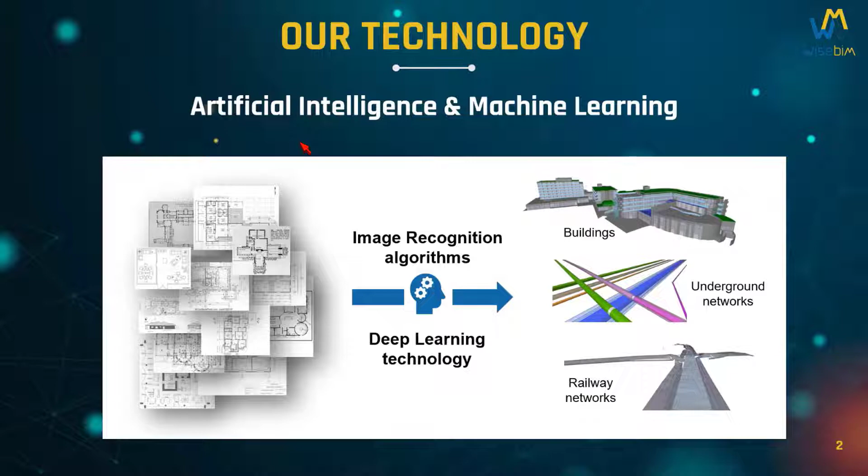As you know, today the challenge is the modeling of plenty of existing buildings. It's too long, it's too expensive. And what we bring, what is our mission, is to simplify and accelerate the modeling process and offer our clients the most efficient preliminary steps. And of course, based on openBIM standard, which is important for us and for our customers.

So let's focus on Plans2Bim. Plans2Bim is an online solution which enables modelers, BIM modelers, to quickly transform directly their 2D drawings into BIM, thanks to artificial intelligence. Just to note, it's patented.

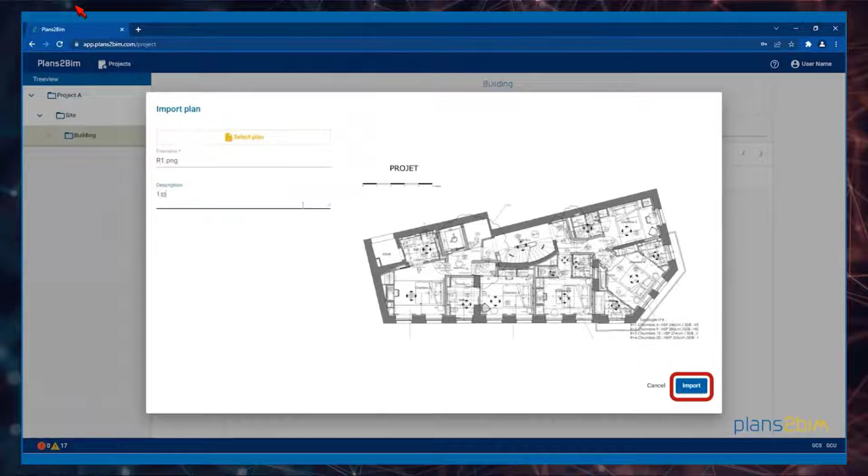So how does it work? You just go online, you have to connect to the platform. You can even try it here already. You create a project, you just provide the description. So we have project A, the building. And we are going to upload a 2D drawing. It could be a PDF, a JPEG, or a PNG format. So we work on pixels.

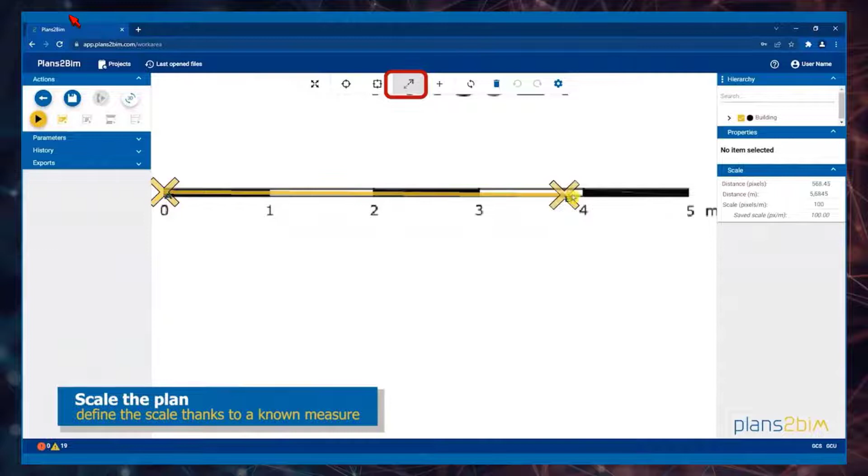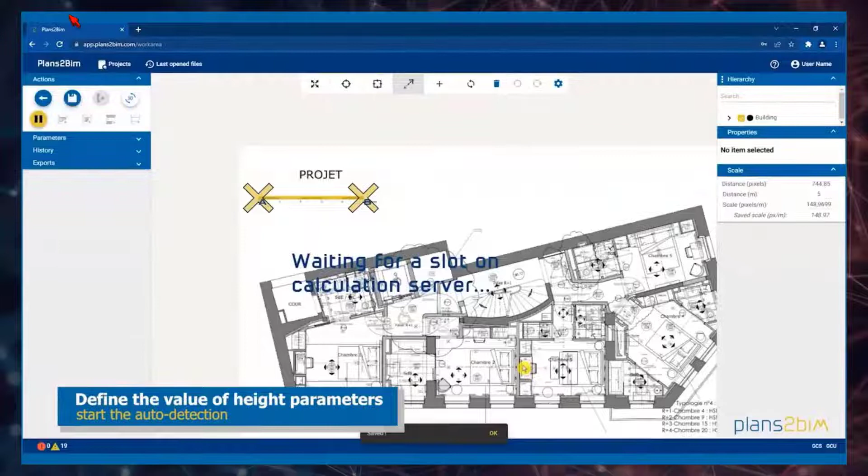After that, we go to the main part, which is the modeling tool. First of all, we have to set up the scale, manually, thanks to this little tool, in order to have a number of pixels per meter. This is quite the only thing to do manually for now. After that, you can launch the algorithms. You can define some heights, like height of the doors, height of the walls, and then you just run the algorithms.

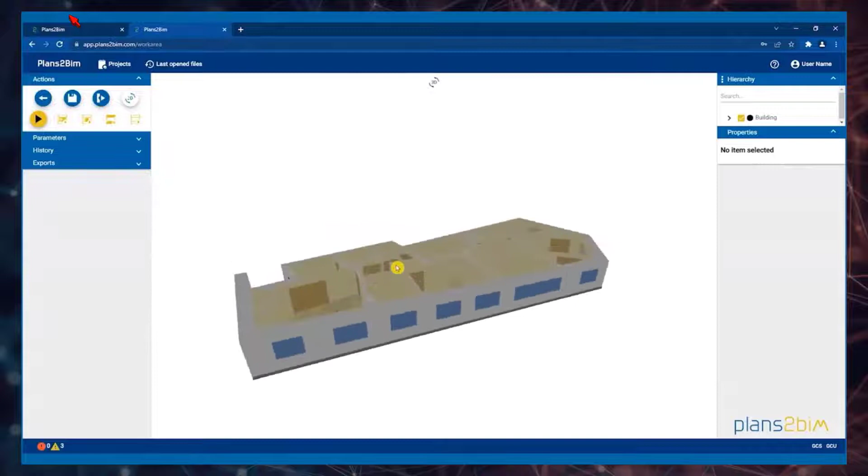In a few seconds, you can have all the walls, doors, windows, slab, spaces, soon columns also. After that, you can see in our 2D or 3D viewer the BIM model which was created. And the good thing also is that you can modify and correct the results directly online, which means you have a tool to create, even from nothing, a BIM IFC file directly online.

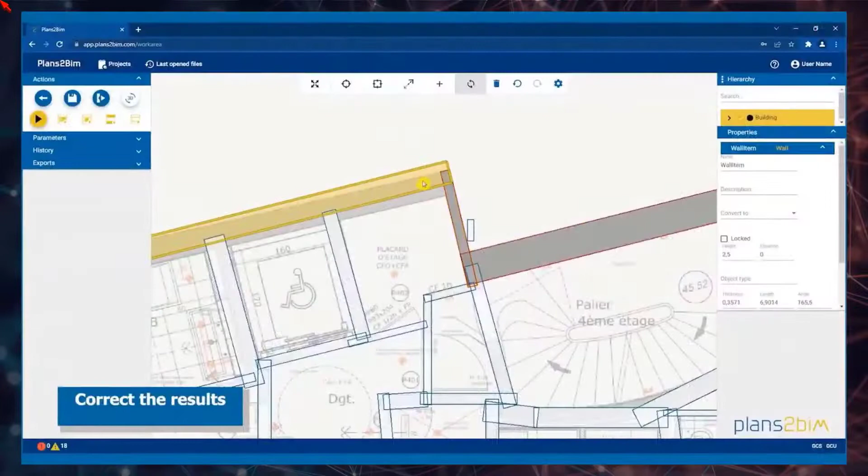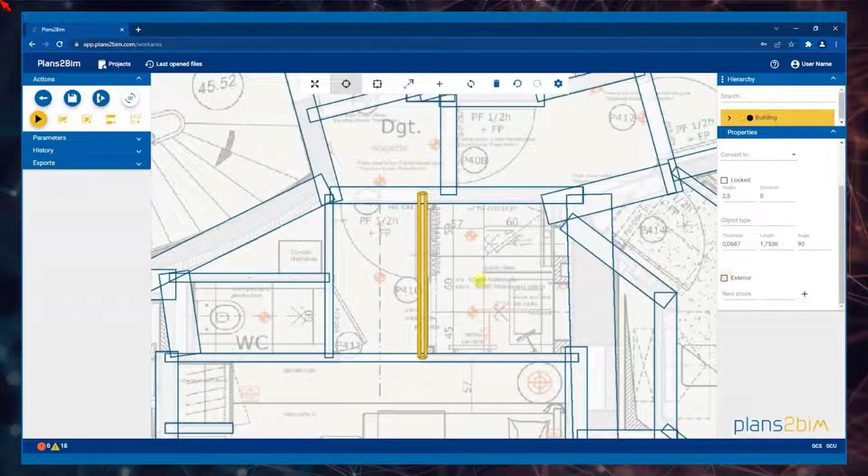So here, for example, we can move a wall, we can suppress some elements, we can also create walls, columns, windows, and so on. So here we just simply create a wall. This wall you can set if it's an external one or an internal one. And after that, you can change, for example, this window into a door. You can change everything, in fact, in this tool.

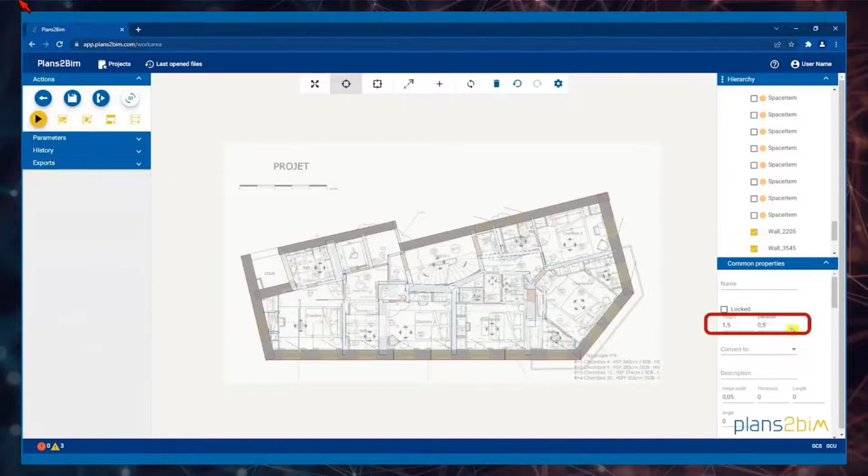So it's quite easy. You can also change the height of any element. Here we are changing the height of the window. And after that, you can even set the properties of elements. For instance, here we set the IFC material to concrete for a wall, but we can also set the material of wood for this door.

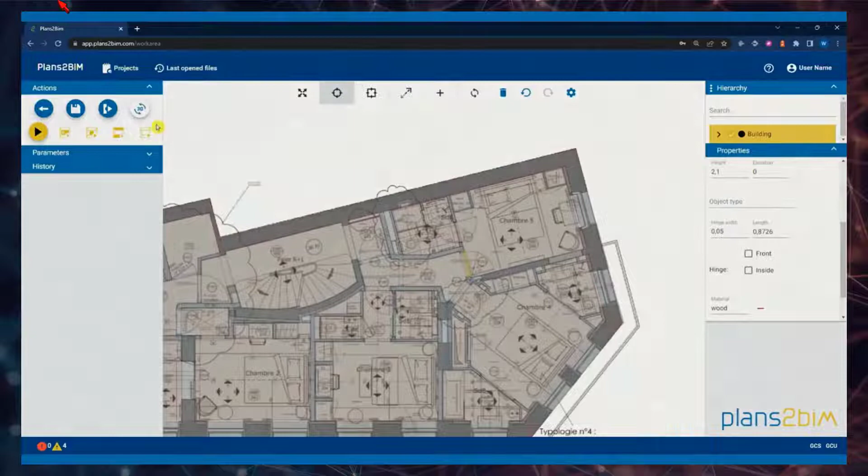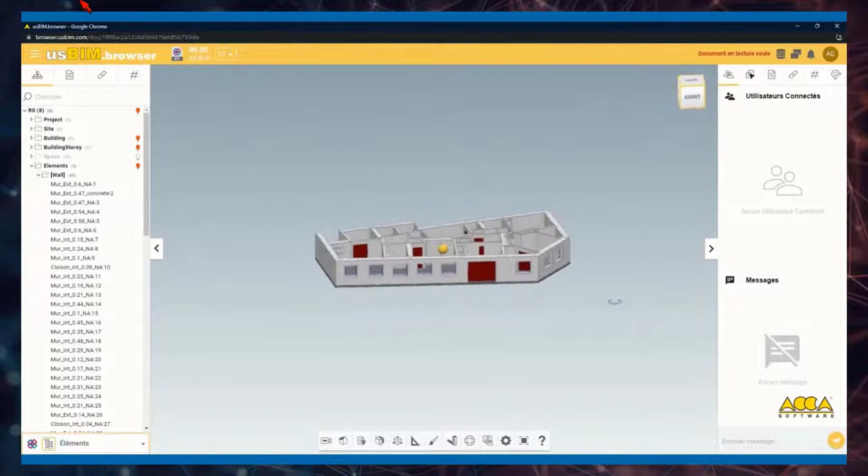After that, you can export in IFC format. Here we export directly. We will see after that we can also export some quantities. So we launch the export, and we can see the IFC file in any kind of viewer. In this example, it's a usBIM viewer from the ACCA software. So you see that it works quite well—the concrete is well defined here.

So this is important. It's an IFC file that we create from scratch, from A to Z. It works very well with any kind of software, even including Revit. And we can also assemble different floor levels.

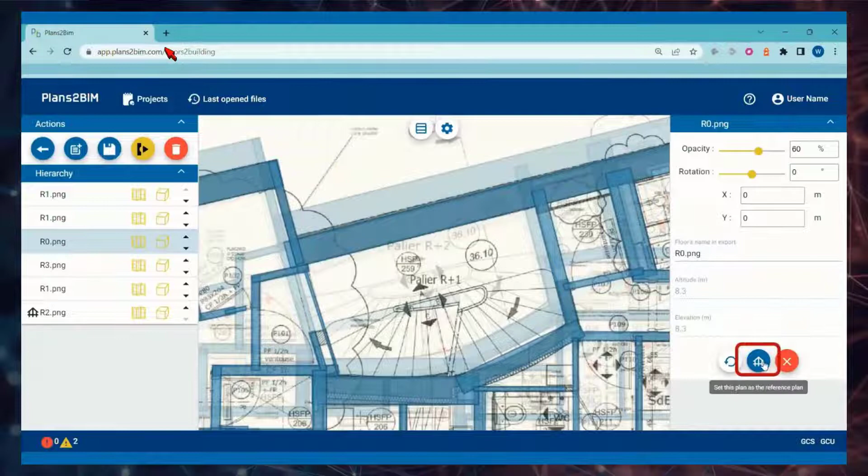Okay. So this assembly is done manually. We just overlap the different floors. You can even add the same floor several times in order to have a whole building. And in this case, you can see that it goes very fast. You just set one of the plans as a reference plan, and after that, you overlap the others from this reference floor. Okay. For now, it's done manually, but soon it will be done automatically.

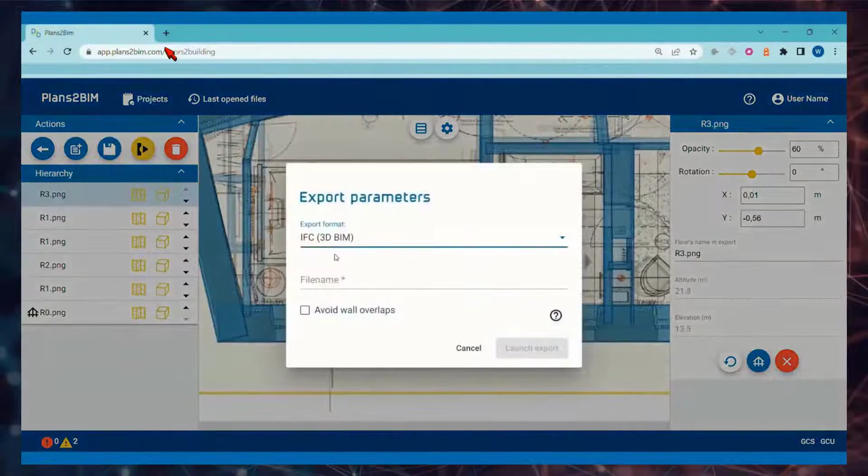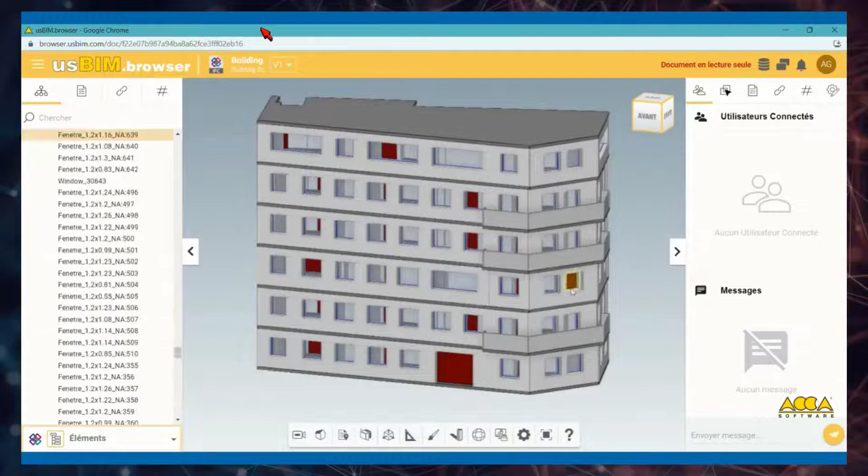So we can also export the quantities in order to get the takeoffs. Okay. So here we launch the export the same way that we did for the IFC. And you can open the CSV file in Excel, for instance, and you have all the quantities, the volumes, the surfaces, the number of everything. Right? Very good.

So the key features of Plans2BIM: it's a collaborative platform. I didn't say it, but you can work with several users from the same company. You can add images from PDF to PNG to JPEG, so it's universal. Thanks to our AI technology, it's very fast. You have a 2D and 3D viewer with an integrated simple editor tool, which could be very useful to have everywhere. And you can assemble the stories. You have, of course, an IFC at the end, and you can also have some metrics details.

So, Plans2BIM in openBIM, of course. IFC and XML are the core of the technology. We try to make interoperability very important for our clients. It's a collaborative platform, as I said. It's simple, which could be very interesting for people who aren't used to working with BIM technology or with BIM software. And it's accessible from any kind of web browser.

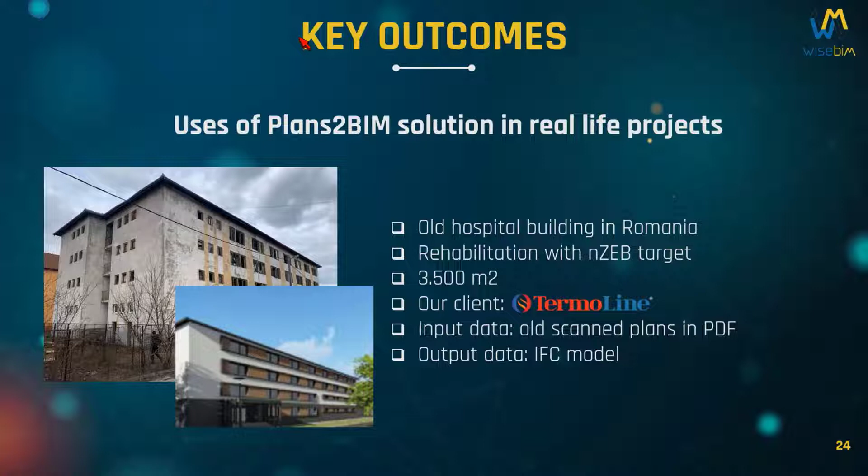And in a real life project, we can have this example. The TermoLine company wanted to renovate an old hospital of more than 3,000 square meters to the nearly zero energy building standard, and they had only old scanned plans in PDF. They wanted, of course, an IFC model. So you can see here such 2D drawings that we have at first, and very quickly you can have such a model. So it's very interesting for people who want to model an existing building as soon as they have some 2D drawings.

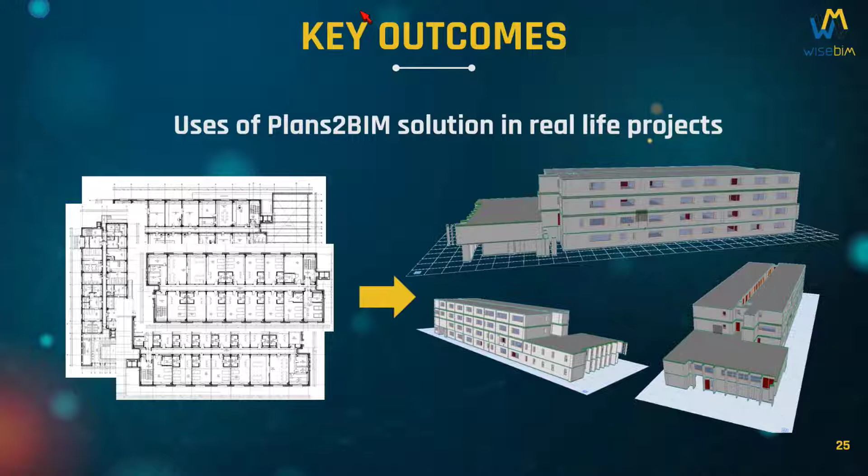And as they say, what they like about Plans2BIM is that it's simple, quick. As I said, you don't have to have specific knowledge. It's compatible, of course, easy and fast. And this is why Plans2BIM is very good. And as I said at first, there are a lot of existing buildings. We think that Plans2BIM will make this transition seamless, open, and at least twice as fast.

So thank you to the buildingSMART Awards jury. We think that we are an accelerator for the digitalization of existing assets, but even more, and I think it's quite important to focus on it, a trigger to encourage all building professions to move to BIM, because in this way, for example, painters, people providing lifts, they can then really use our technology, and in particular, we managed to go to openBIM, which is important for us.

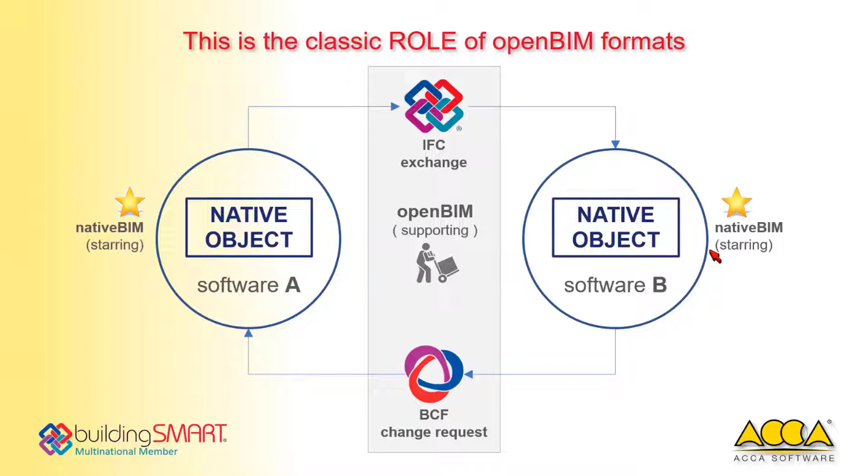What we want to do today is to show you another point of view of openBIM, a more closely connected approach. And we think that with our knowledge and technology, everything that we will talk about is already possible in practice. So this is basically the new role that IFC and in general open formats could and should have. The IFC format is at the center of everything. What this means is that the various software will only give functionalities to those formats. So the native format will become the open format. And this, we think, is the only way to make openBIM the starring role.

So this is also in line with the technical roadmap from buildingSMART, and we completely agree with such roadmap in the sense that if we really want to reach all the benefits that openBIM can bring to software vendors, but also and most importantly to the end users, then we have to follow this approach. So what I would like to do next is to show how we do this in practice and how with the use of those tools we can already see what this approach is all about.

So the first tool that I want to talk about is usBIM OpenCDE, which is a tool for connection to and from other common data environments. And this allows seamless document exchanges and data workflows. And before going into practical use cases, let me explain what the role of the common data environment is, what we think a common data environment should do. We think that it should operate directly on the open formats, so IFC, IDS, BCF, but also services such as the bSDD.

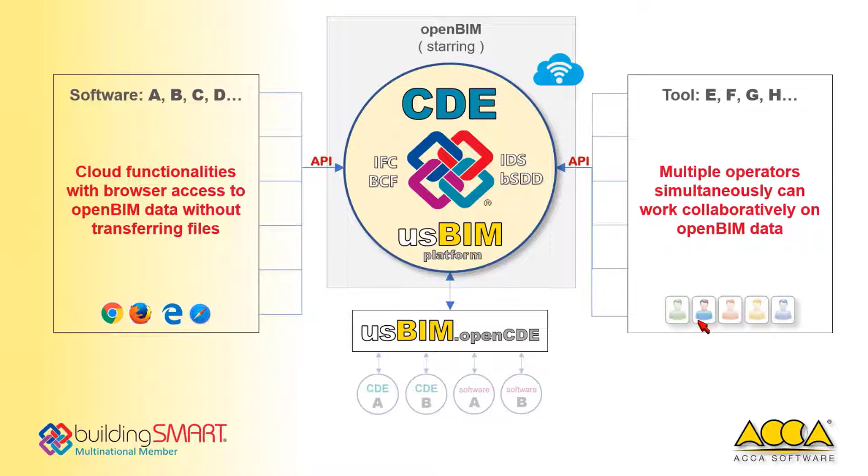These are the tools that we will see more in detail that are part of the usBIM.extender ecosystem. But I want to point out that thanks to the use of APIs, anyone can write new tools and can join this ecosystem, as well as use other similar architectures as well.

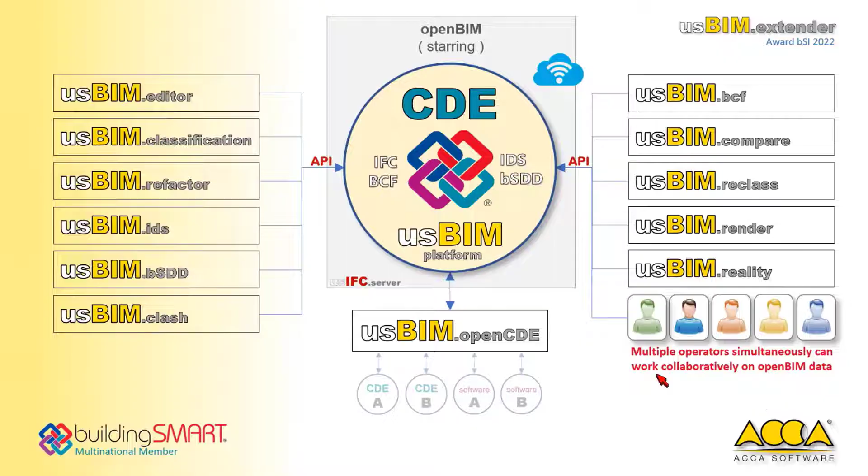So in order to show you the various tools, I will use this workflow to help me around the way that is 100% open. So what happens is that we divided this into three parts. This part is the editing part, and as I said, everything starts with the use of any kind of software that will use an IFC model, and will upload to our common data environment.

Everything that will happen in the cloud, online, and everything that will happen from multiple operators that will use different tools will update the IFC model in real time. So everyone will see the change that happens in real time. So for example, what kind of operation are we talking about?

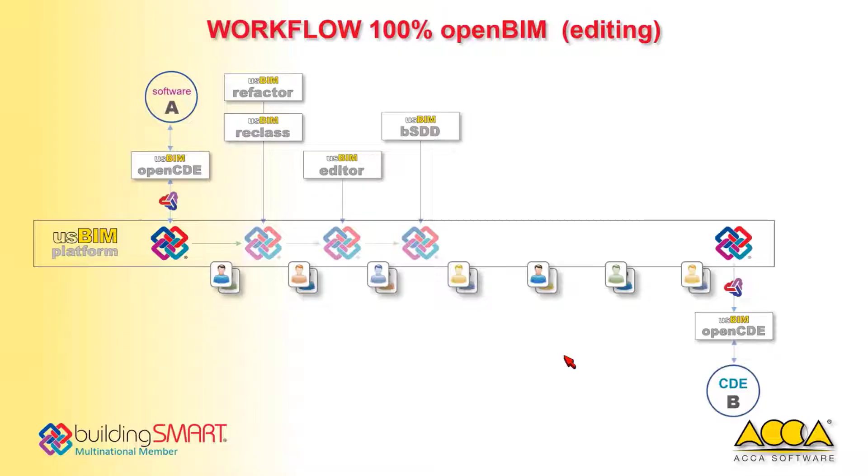Refactoring of the IFC model in terms of spatial structure and classes, but also editing of the model in terms of its data and geometry. And when needed, a connection to the bSDD to ensure that the data in the model has high quality guaranteed by the buildingSMART methodology. So I will go into the details of those tools, and for some of them I will show you a brief use case in a short video.

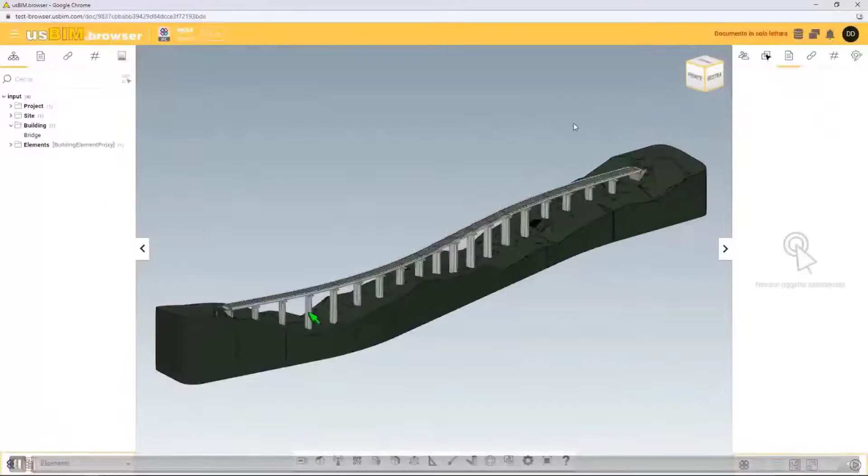So usBIM Refactor in particular is the tool for refactoring and/or merging different IFC models. And what it does is that it allows to reuse the geometry of one or more IFC files to create a new IFC file, also in a different version if you need to update it, by reorganizing spatial structure, IFC classes, and entity documents.

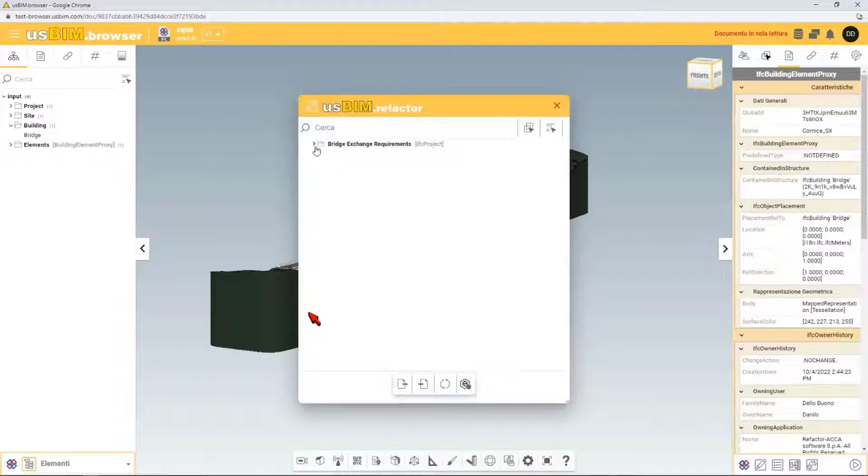And what I'm talking about is that whenever you have a model, for example, you need to upgrade to a newer version of the standard, because, for example, here everything is a building element proxy because it was not supported by the BIM modeling, then you can do two things. You can change the IFC classes and define a new spatial structure. And this is very important because different spatial structures are needed for different BIM uses and use cases.

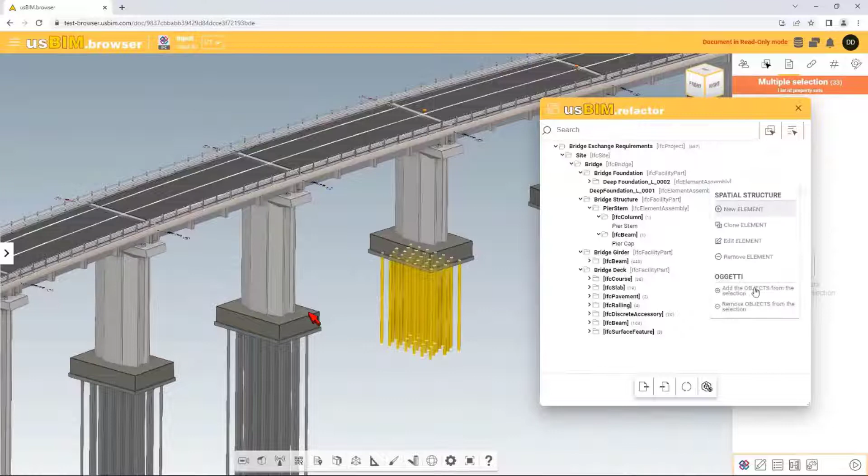So more often than not, and this is something that we learned from the IFC 4.2 project, you want the same geometry but with its structure reorganized. So this can do exactly that. New spatial structure that the user defines, and then assign geometrical elements to the new defined spatial structure. In this case, you can decide also to change the IFC class of the geometrical objects and to add its properties, predefined types, and so on.

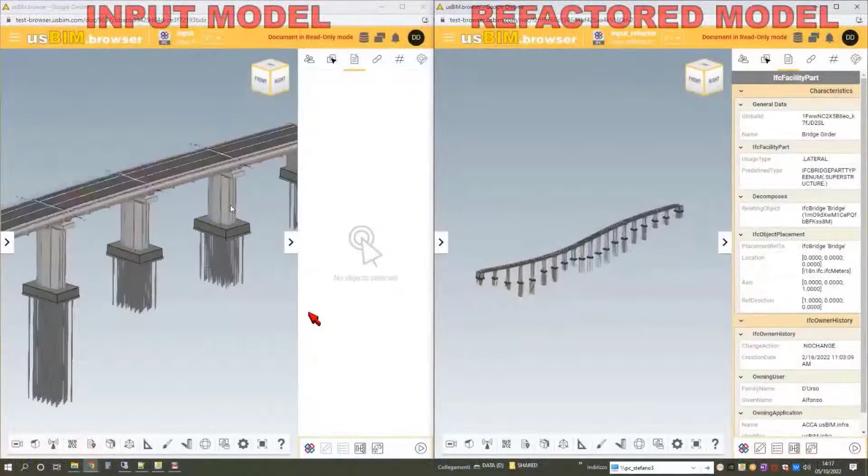In the end, what you will get is a new IFC file which is updated in terms of classes, if needed, in terms of IFC version, of course, if this is what is needed, but also, most importantly, with regards to its spatial structure, because as I said, different BIM models may require different spatial structures to be available.

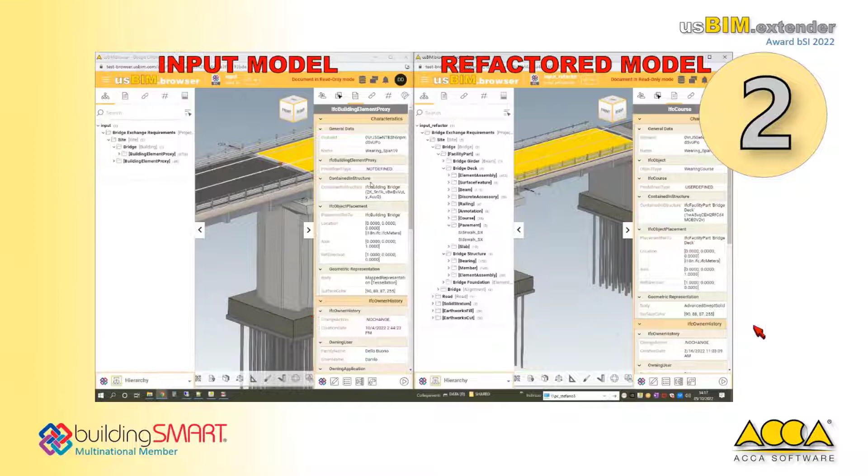Other tools, such as usBIM classification, allow editing the classification of the IFC model entities. And in particular, multiple users can work on the same IFC file at the same time. Then we have usBIM reclass that we have already seen in action, which allows to change IFC entities classes in order to add semantic meaning to the BIM models in the IFC file.

Then, very important, usBIM editor is the tool for editing BIM models directly in IFC file. So you can edit name, properties, geometries, and so on of the entities of an IFC model and generate a new IFC model with the updates. Again, multiple users can work on the same IFC file at the same time.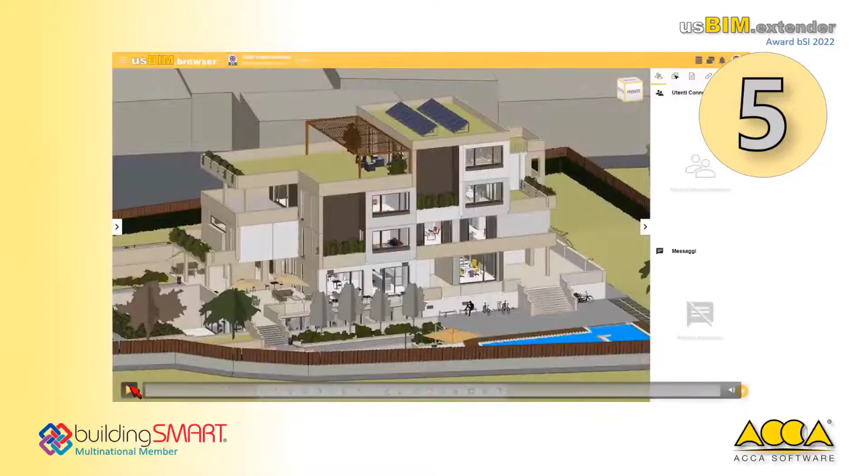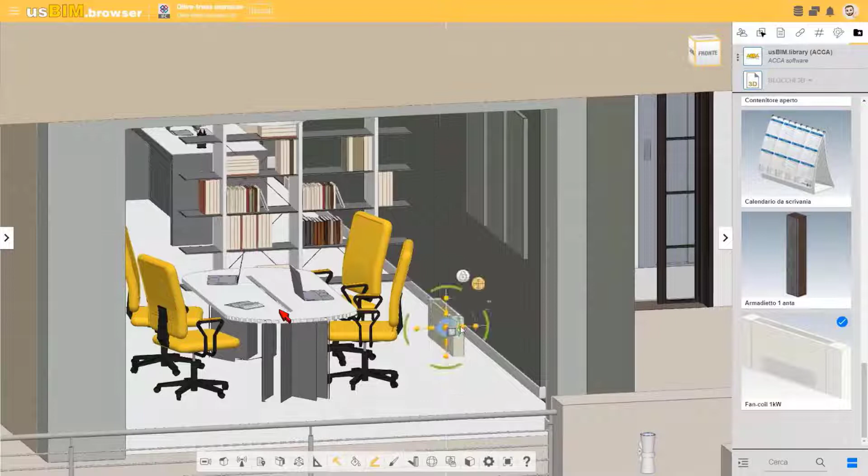So let's see this in action and think about, for example, if you are in the asset management or facility management phase of the project. So you need to do a lot of small operations on the model. And of course, for example, here we are removing one flow terminal and adding another one because it has changed during the years. So of course, you want to do this directly on the open format. You cannot think about going back to the authoring tool that generated the data only to change this object.

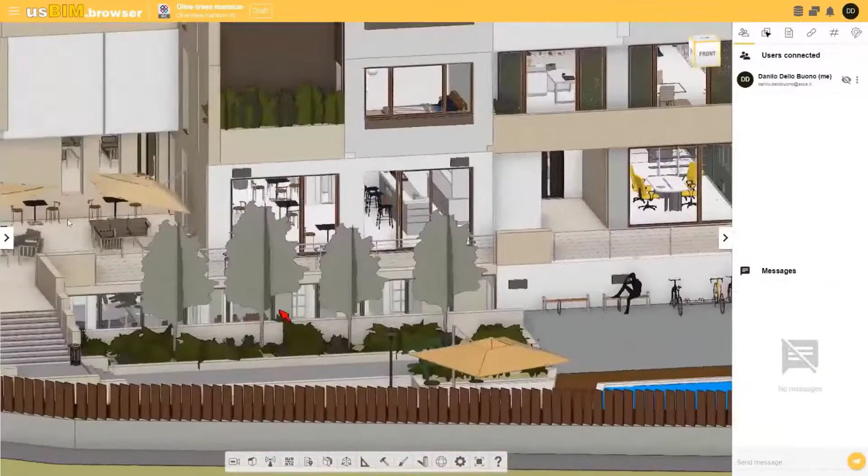And there are a number of other operations as well that you want to do daily, and maybe more often than once a day. So for example, here we are deleting some objects. There will be also the possibility to move objects around and so on. And this is particularly important during facility management. And also what is important is that different operators will have the ability to do this at the same time.

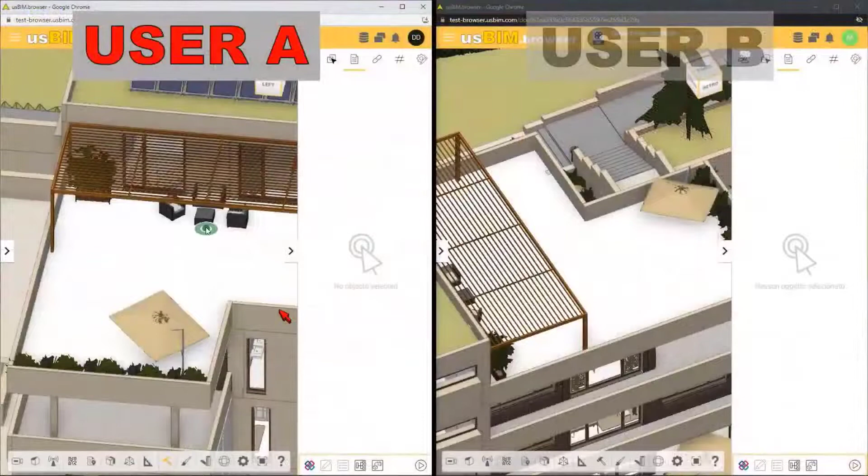And in particular, when I say at the same time, what I mean is that since changes happen immediately on the IFC model, we can have, for example, user A on the left that is editing the model, and another completely different user on the right, user B, who sees what changes are happening on the model in real time, because the data is updated directly.

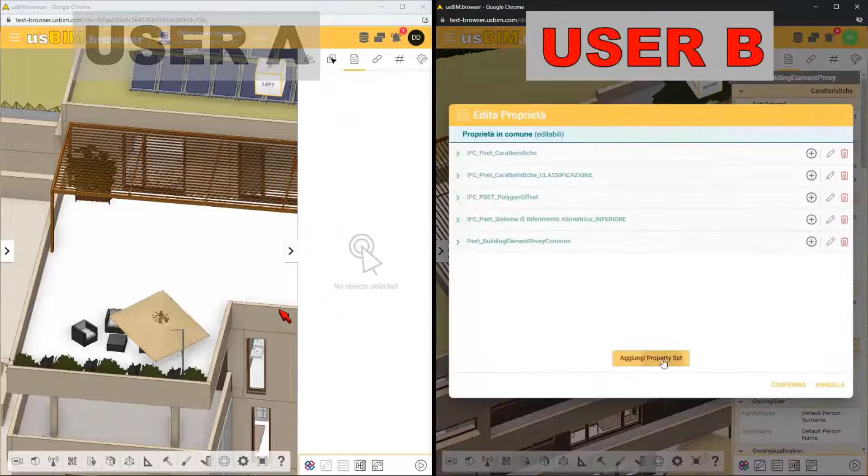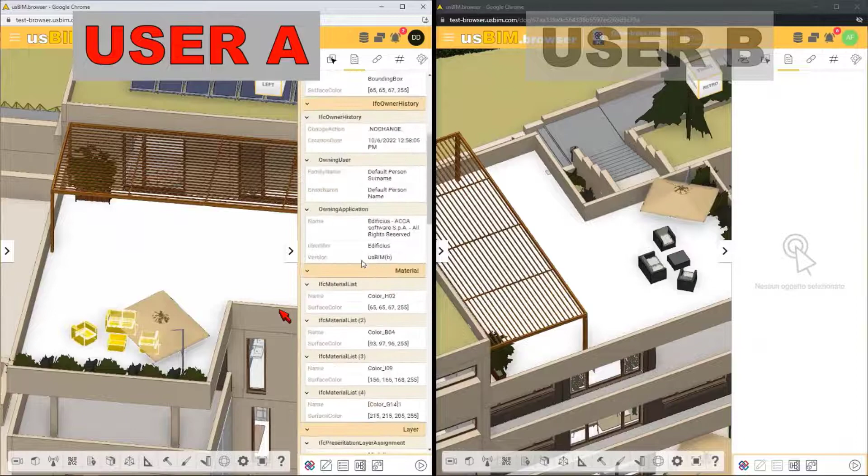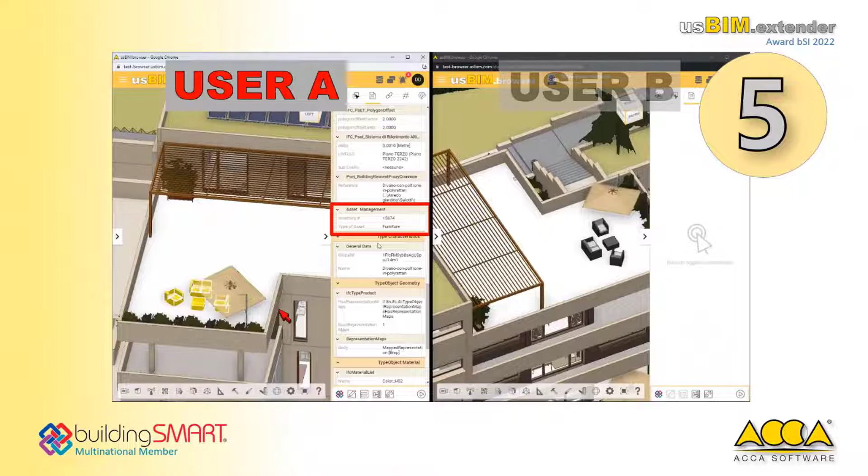Of course, the contrary is also true, because if on the very same object that has just been moved, the other user starts editing the properties, changing its values, adding new ones, and so on, the changes are reflected back to the user that was moving the object as well. So all of this is possible because we are working on openBIM data that is updated in real time, regardless of the tool or the software that is actually doing the editing of the model.

Then we have usBIM BSDD, which is our way to connect to the BSDD and to enrich the data of the IFC models with this standard workflow proposed by buildingSMART that ensures data quality and information consistency. So let's see an example. Let's say that we want to connect to the ETIM domain, for example, and we want to classify those photovoltaic modules that we have on the roof. We have connected to the ETIM domain, and then we can start to do a search in this dictionary to see what is the proper classification for those elements.

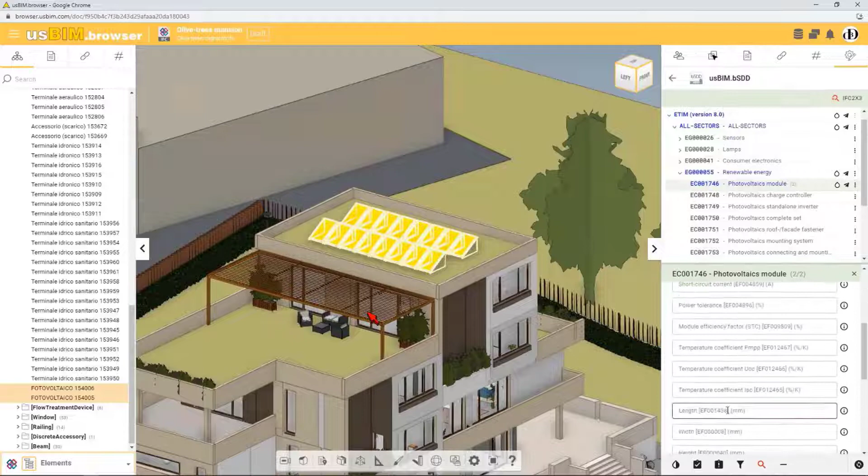So we choose the correct one, which is photovoltaic module, and we are asked to fill the properties that ETIM tells us we need to put for those classified objects. And again, everything happens in real time. So the changes from one side are reflected to all the other users in terms, in this case, of IFC classification references and property sets.

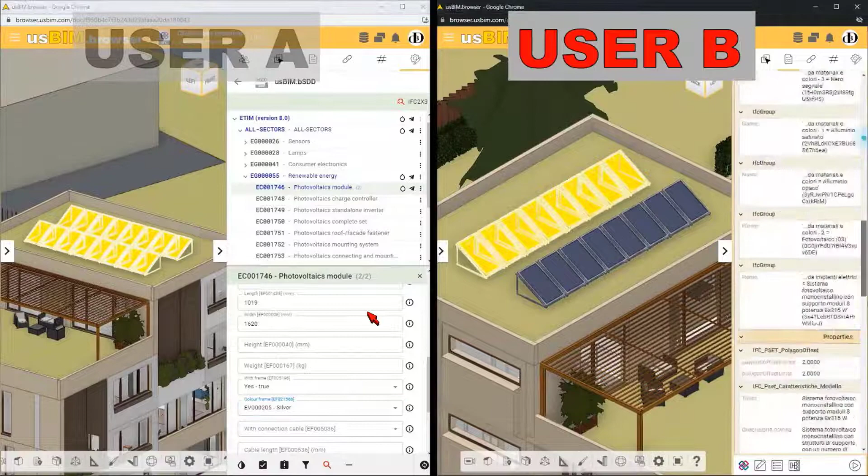And every time you update the values of the properties, for example, the other user will see the changes being reflected in real time. And more in general, BIM is a collaborative process. And thanks to the use of openBIM, you can get as collaborative as you want, as shown in those examples.

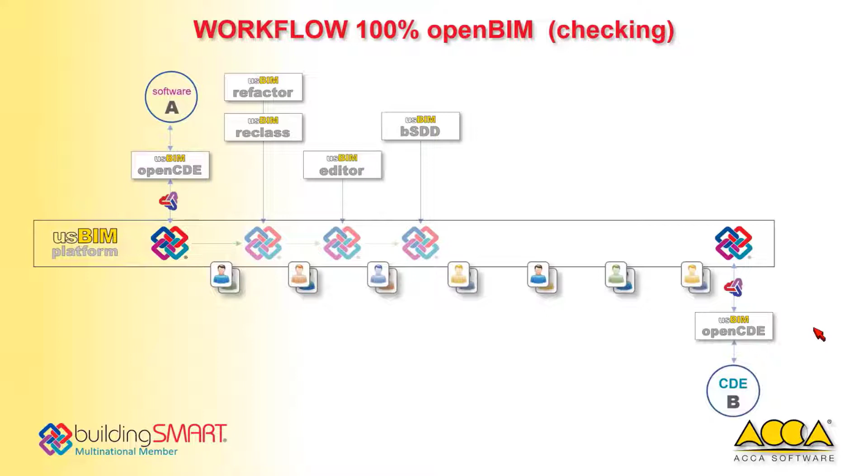So let's continue in our workflow. We are now doing the checking part, not the editing anymore. So basically, we can use different tools and standards. For example, the new IDS standard from buildingSMART to check the content of the IFC model, but also do code checking and clash detection.

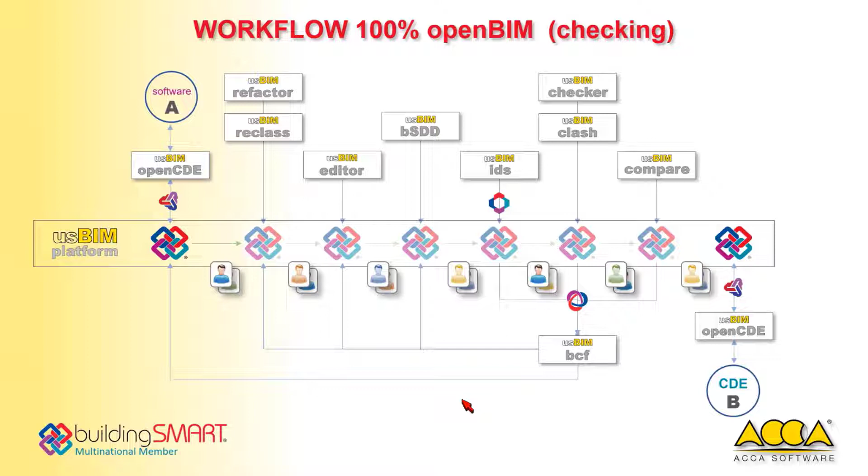Another important point is that every time you need to go back in this flow and you need to do communication inside your project team, you can use the BCF to go back at any point in time of the flow. And of course, this means that you have a loop made for improvements in order to solve the BIM issues that you will find along the way. Also, this is very important, you need a way to see the differences between different versions of the files that you are producing.

So usBIM IDS is the tool that will allow you to check the IFC models using the IDS standard from buildingSMART, so information delivery specification. usBIM Clash will allow you to do clash detection, so highlighting geometry conflicts in a federation of different IFC models, and usBIM BCF is what you need to discuss and solve issues in BIM models in IFC.

Also, usBIM Compare will allow you to catch immediately the differences between different versions of the IFC models, both in terms of geometric parts and/or data. So let's see an example of the comparison of different versions. If you have followed the previous videos, we have made some editing of the model. We have classified some photovoltaic modules, but also moved some objects around.

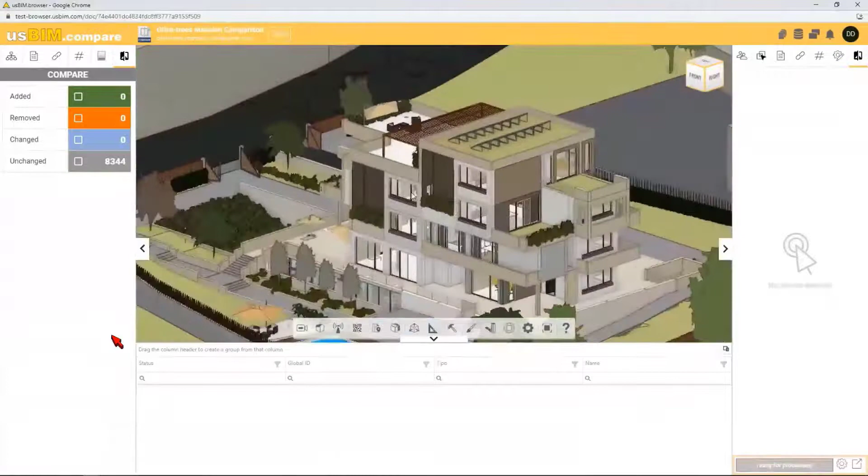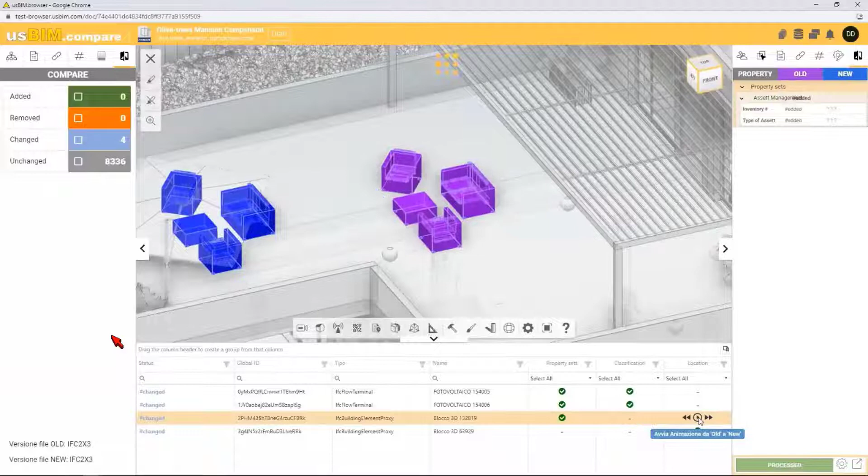So we will take two versions of the model, and we will launch this detection process, basically that will tell us what happened between those different models, and so we see the properties that we have added, but also the movement that we've done to the object. And when possible, for some of those operations, there are animations, for example, in this case, to show the movement that happened. Again, every time you need to collaborate and communicate to other project team members, you can always use the BCF to do the communication.

And of course, for the editing part, every action that is done on the model is tracked down and logged in under the policy of the CDE, of the common data environment. Because remember that we are on a common data environment. So it's not like every user can do whatever he wants on the model. So we respect the policy of the CDE.

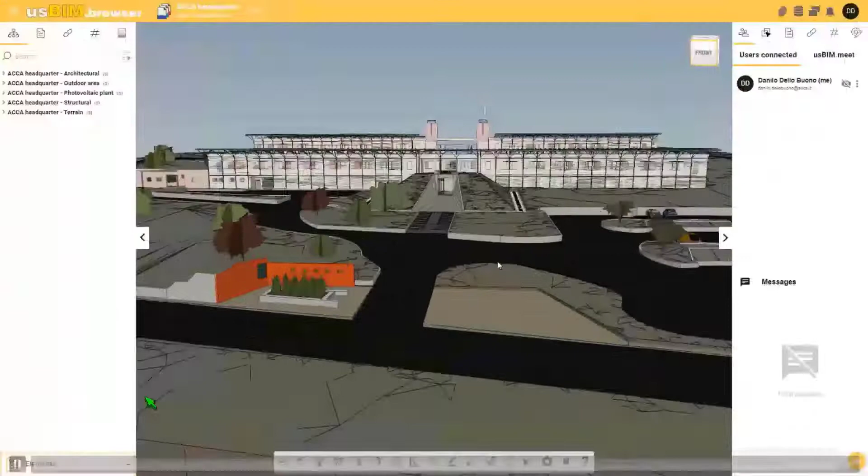So, okay, I will do the last part about the presentation, because we can also create with BIM Render professional, photorealistic, and real-time renderings of the BIM models, and with BIM Reality navigate the models with virtual reality. Again, everything will happen directly in the browser, and this is, for example, the virtual reality part, where we can navigate the model.

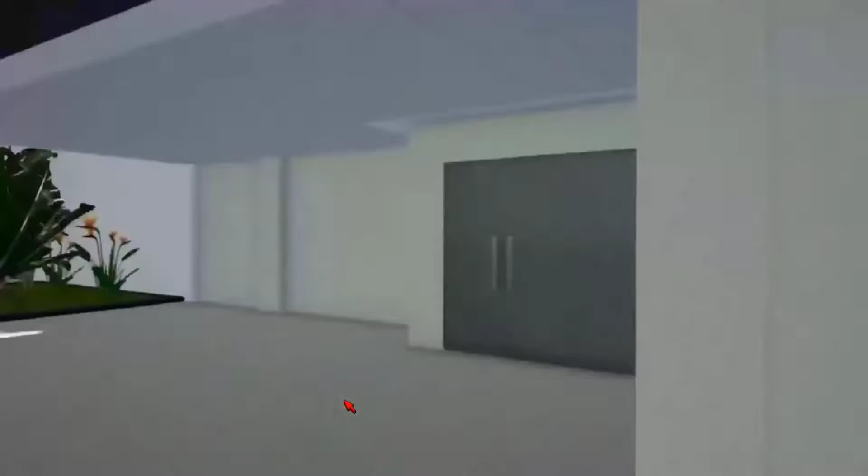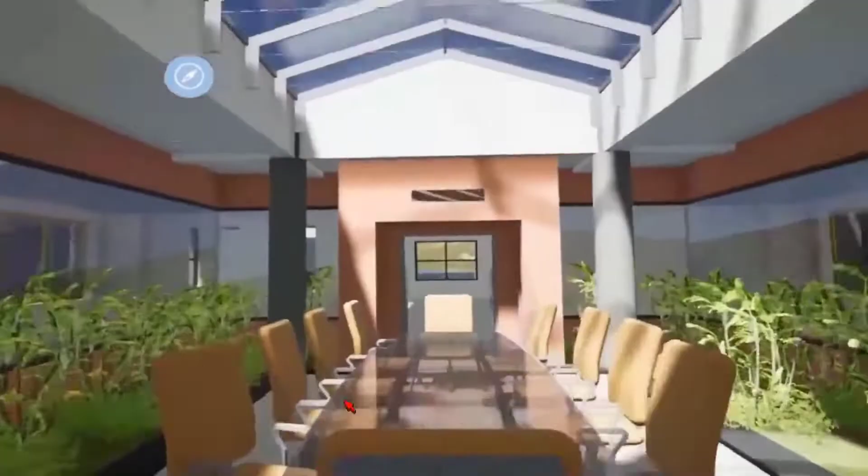And since we are on a common data environment, we can always, for example, query the object to see the attachments to each object. Or we can simply navigate the model, and we can also think about applying some of the editing to the model directly from the virtual reality. For example, moving objects, deleting objects, and so on.

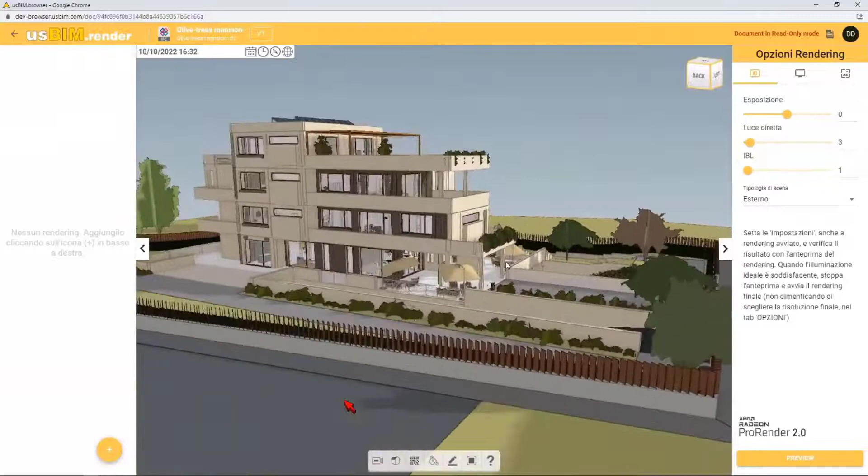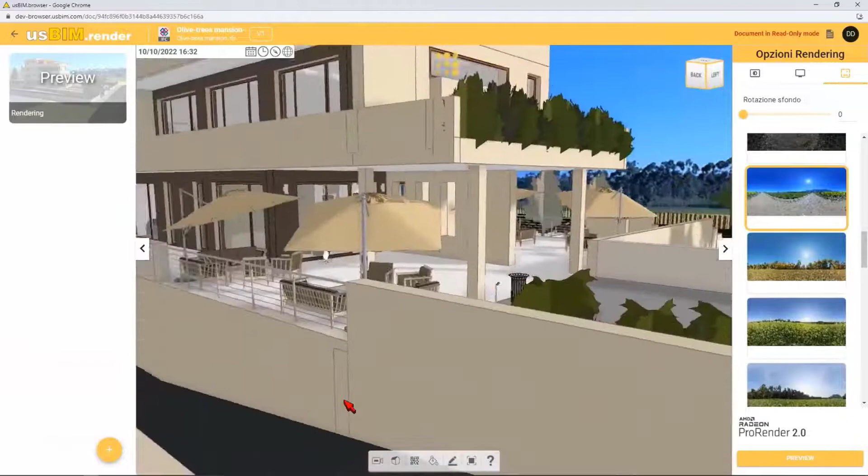With regards to the rendering part, we have integrated directly online the AMD Radeon ProRender 2.0 engine, which, thanks to the use of artificial intelligence algorithms, allows basically to create photorealistic renderings with high quality and in short time. So the user has only to choose the right angle, the right spot, and the artificial intelligence will take care of the rest.

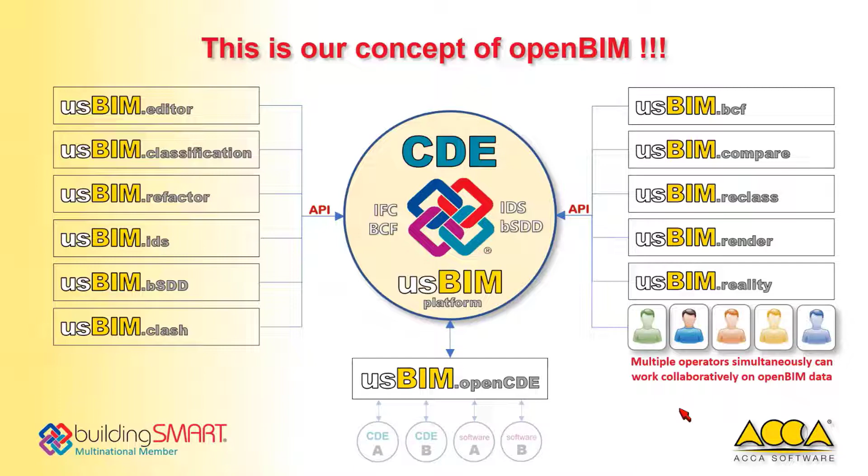So to conclude, everything that we have seen so far is a 100% workflow in openBIM, and the user acts directly on the open environment. Every tool is interchangeable with others. Others can be added as well, and at any point, the user can decide, thanks to the use of the OpenCDE API, to gather its data and move to other ecosystems as well. So yeah, this is our idea and our concept of openBIM, and I hope that I showed you that everything that we have talked about is already a possibility in practice.

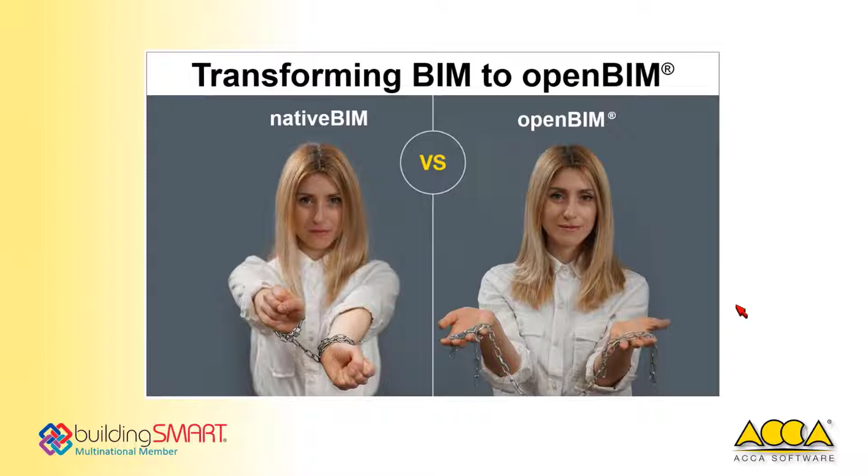So, as a conclusion, what is our mission? Well, at ACCA Software, our mission is to transform BIM to openBIM. And in particular, we want to make open standards and IFC in particular easy to use for the end users, because we really think that this is what will help to spread the adoption of openBIM and in particular the IFC format. So that's it for my presentation.

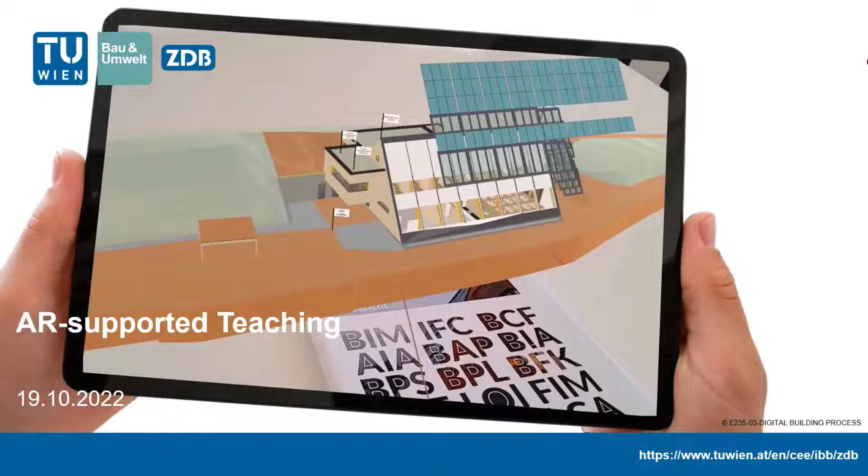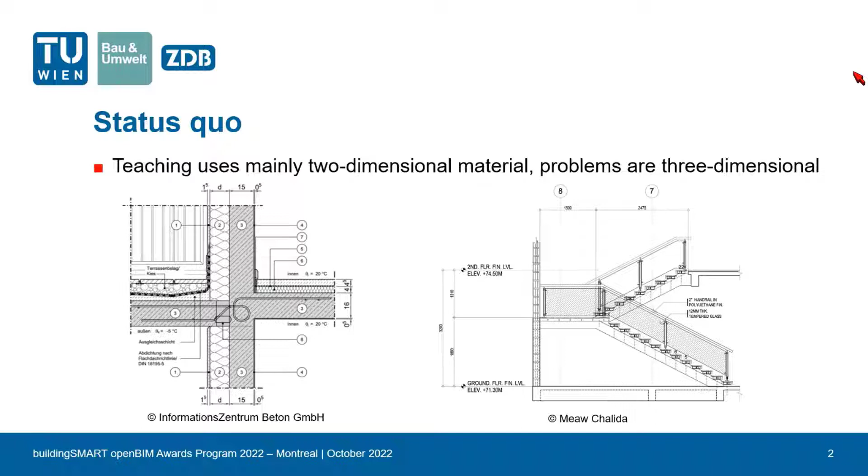So this is how teaching civil engineering students has traditionally looked. Two-dimensional plans and drawings for problems in the real world which are inherently three-dimensional. And with the emergence of augmented reality as a new technology in our field, we thought that we could leverage this new technology to provide students with a more approachable way to explore building processes and problems.

But during a case study, we found that current augmented reality software solutions are either part of a closed-off ecosystem, which limits the reusability and shareability in a teaching setting, or they are part of an open source library, which often requires programming skills.

That's why we started off building or prototyping our own solution called AR Supported Teaching, a platform for teachers and students to exchange and view IFC models in augmented reality, enriching them with comments and data specific to the educational process. Our research unit focuses on the use and promotion of openBIM, which is why we chose IFC for our data format here.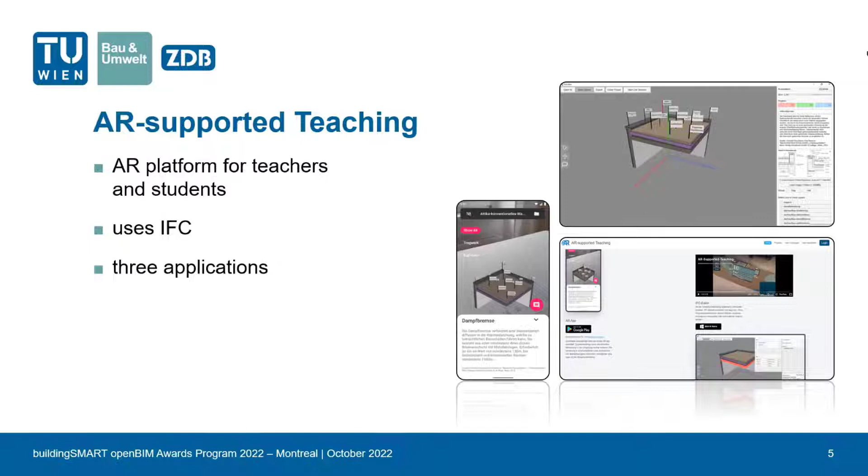The platform is split up into 3 applications, which I'm going to show you now. First, there's a desktop editor, which allows importing one or multiple IFC files and allows the teacher to add different didactic elements, like animations to show the structuring or layering of a building, annotations placed along the surface of a model including text, images or videos, as well as a button layering system where subcomponents of the model can be grouped together to control their visibility.

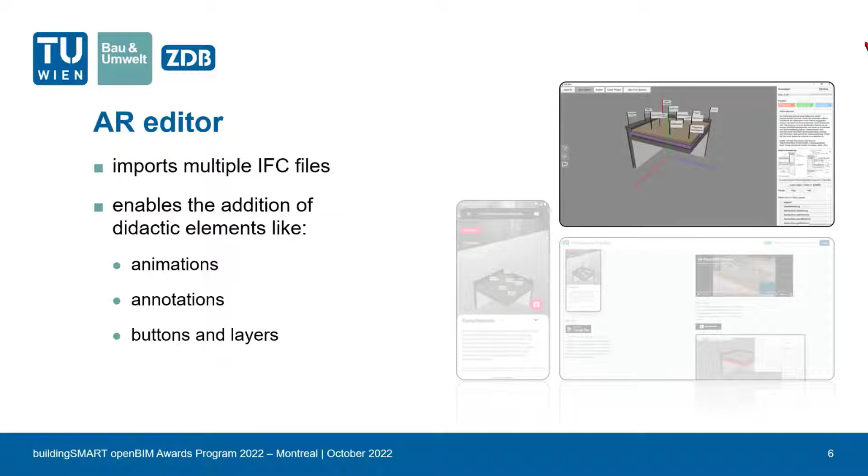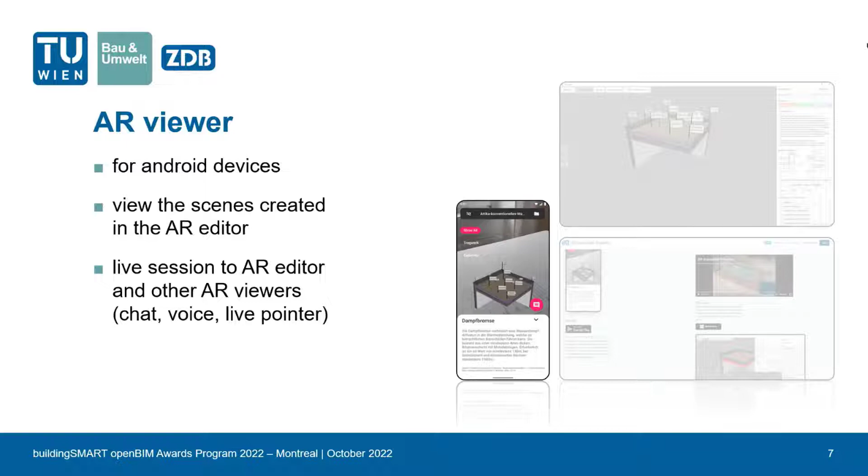These created teaching scenes can be opened inside the augmented reality viewer application, which runs on Android devices, either smartphones or tablets. The created scenes can be opened and all the provided information explored. Additionally, we offer a live session where students and teachers can interact and share chat and voice messages, as well as live 3D pointers.

Lastly, we have the link between these 2 applications, which is our web platform, allowing for group management and role management, where teaching scenes can be assigned to different user groups and new editors appointed, as well as a project overview where teachers can see which projects have been created in the past.

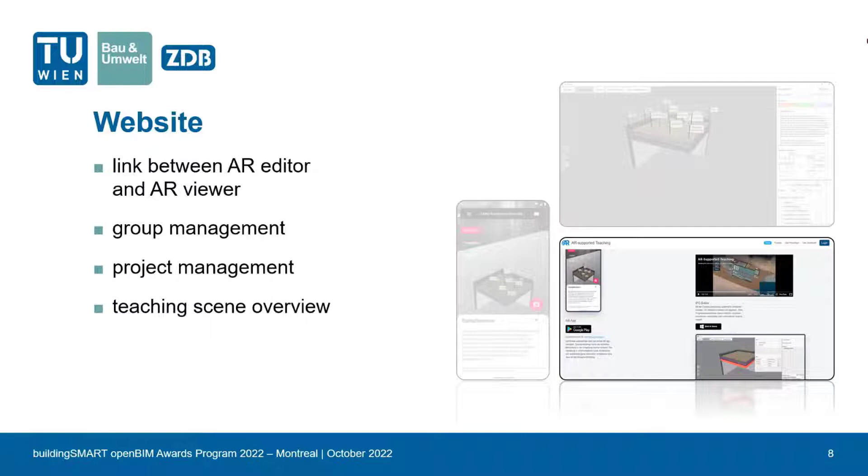Together with this IFC and the JSON, these two files are pushed to the application where access control is handled, and the augmented reality viewer then downloads these two files and displays them in the AR view. Lastly, we have this option of a live session where teachers and students come together and discuss the teaching scene and exchange text and voice messages.

Over the last year, we have created around 40 different teaching scenes, spanning a wide variety of building problems, across timber construction to concrete buildings.

Now, how does openBIM come to play in our project? IFC is really our primary import format, which allows us to be software independent, so we are not really dependent on one single software manufacturer. All created teaching scenes are stored as IFC, so we kind of future-proof our efforts.

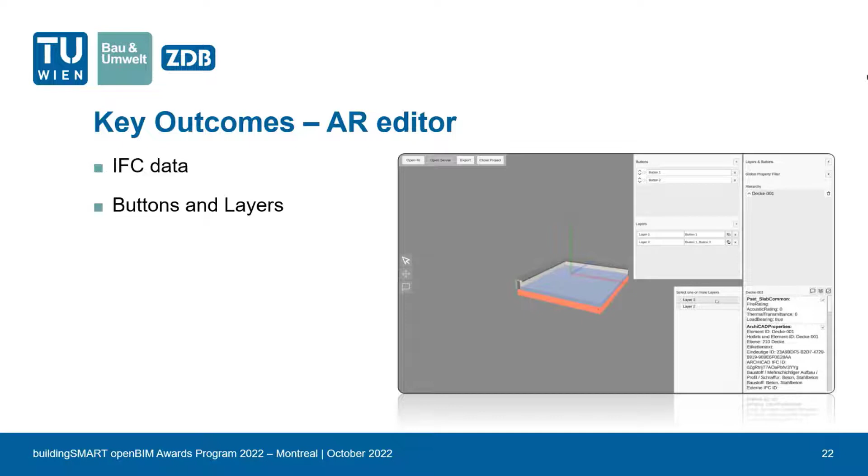Then we have this layering system, which allows us to group together parts of the building on a layer and thereby create a step-by-step showcase of a model. These model parts can be assigned to the layers, and you can preview the action of these layers.

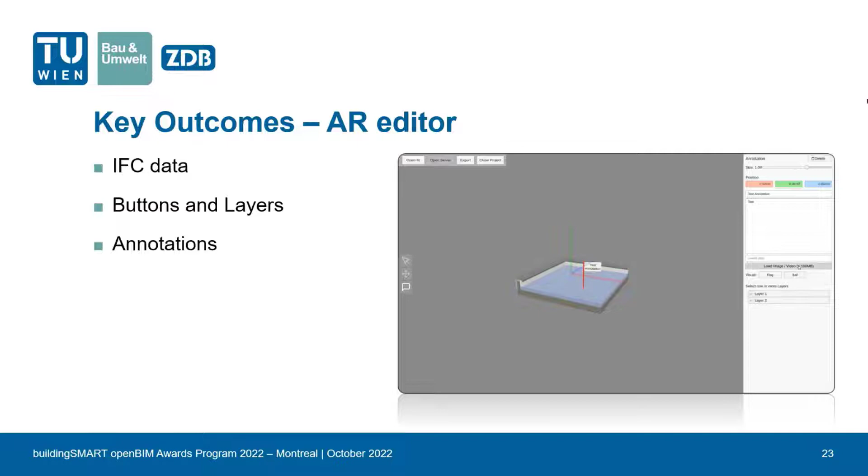Lastly, we have the annotations, where the teacher can put up these flags and add titles and descriptions, as well as images and videos, and again, they can be assigned to the layer system.

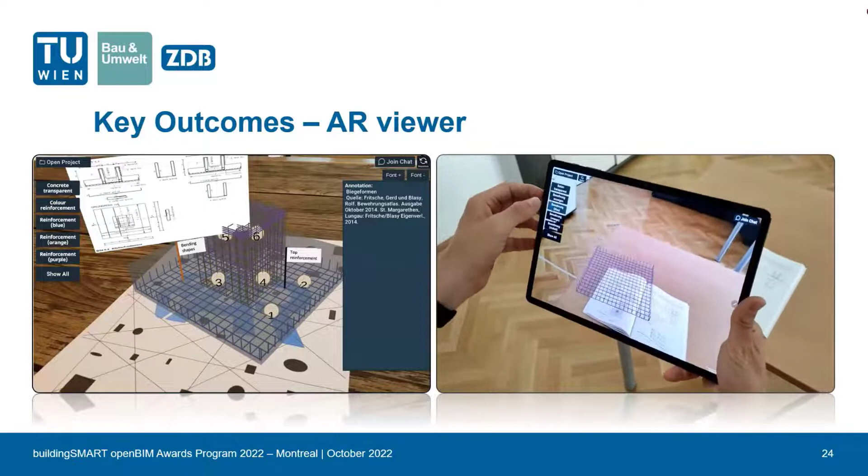And this is how it looks on the viewer application. On the left side, you get the previously defined buttons. On the right side, you get the information on the selected element, which can either be an annotation or a building element. And you get the whole augmented reality experience through being able to look around in all directions and open the annotations as well via this layering system.

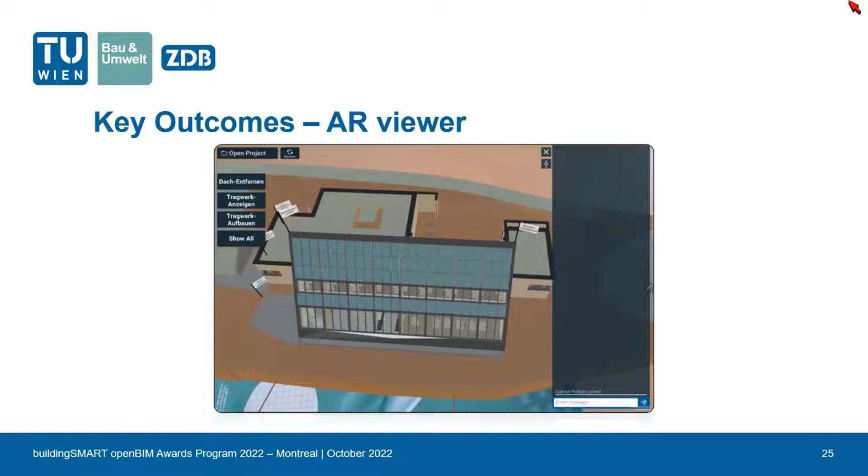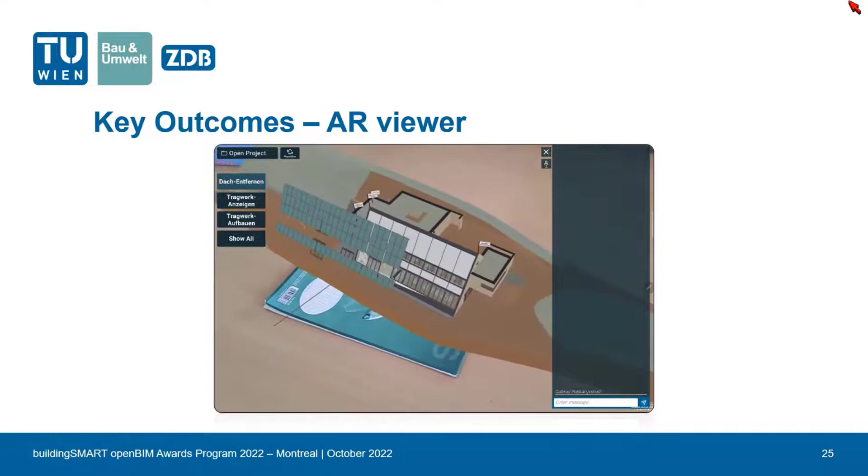In a more advanced scene, we allow the creation of animations. So here's an example we did for the Ministry of Sustainability and Tourism in Austria, where they were planning a new teaching center, and we did this visualization for them to show off the window front, which also integrates solar panels, as well as the timber construction underneath.

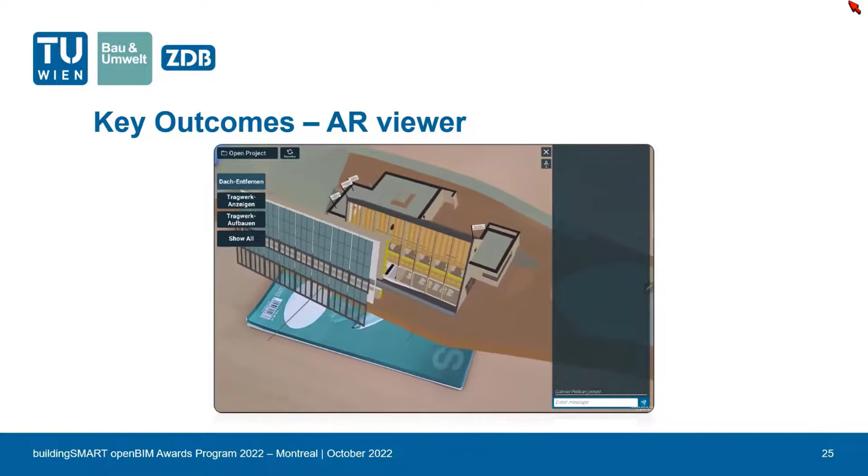We then took this platform and did a usability study with it. For the viewer application, we used the handheld augmented reality usability scale, which is a rather new usability score. And here we only scored okay because students as first-time users had issues with holding the tablet with two hands and still interacting with it, with the application. So here we would probably add a carrying case to the tablet, which allows the operation of the tablet with only one hand, which would alleviate this issue.

The editor application scored a bit better with the System Usability Scale. Here there were just some inconsistencies inside the user interface. But our key takeaway from this prototype was that really a large number of students thought that augmented reality can increase the learning effect.

During this project, some key publications have been made. My master's thesis on AR training application and authoring tool for 3D BIM visualization in civil engineering was written at the Department of Informatics together with the Department of Civil Engineering. Building upon that, our research unit published a paper called Augmented Reality in AEC Education, a case study, where the previously mentioned evaluation was done.

So with this, I conclude my presentation, and again, thank you for inviting us here, and I hope I have given you an insight into our augmented reality supported teaching platform.

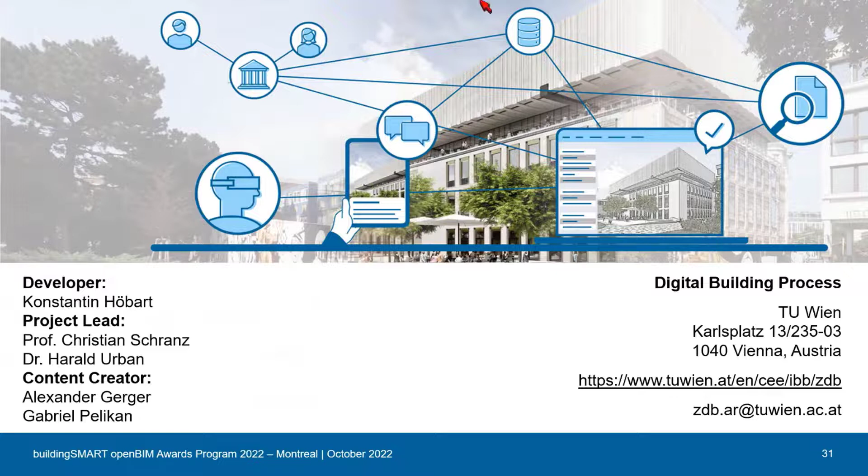Christian, can you hear us okay? Yes, I can hear you. I'm sorry for not being there, but COVID hit me just the day before I planned to fly to Montreal. So I hope you can hear me well. We can hear you very well, thank you. Okay, are there any questions from the jury?

With the plans to BIM, we have really old buildings, and then they are created like with plan drawings, and we see that it deviates from reality. I've had projects where the facade was 1.5 meters wider than the plan view. So how do you cope with it?